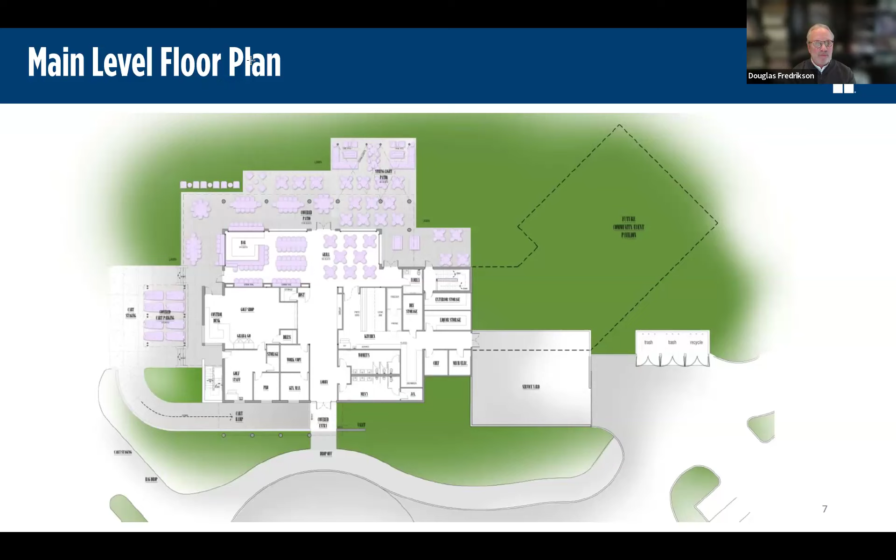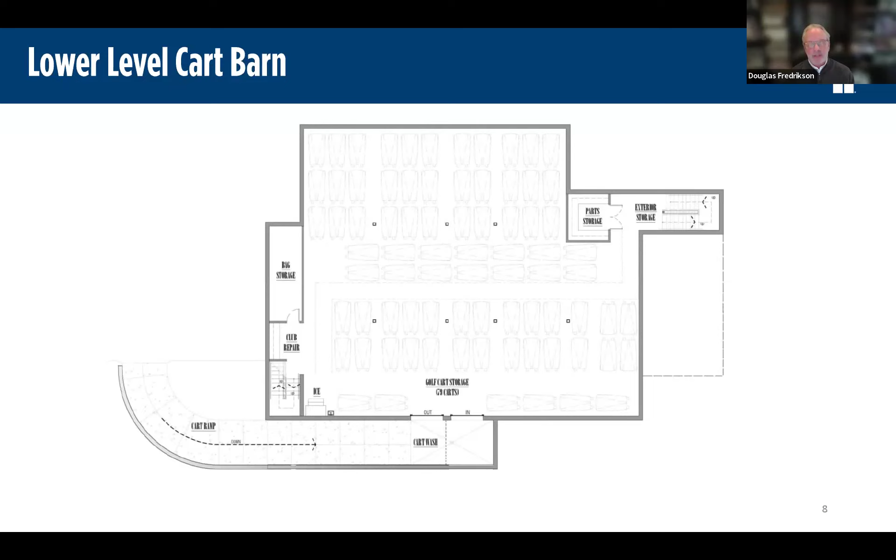We put the full fleet of 79 carts down below grade. This will be a basement level, accessible by a cart ramp that takes you out to the cart staging area. It includes bag storage, club repair, and small parts storage. This is very functional, covering all the parts we need and the code requirements. This is about 6,000 square feet of space, very efficient, as we're wanting to keep costs down because building costs these days are very expensive.

It's a very simple, low profile building, keeping in mind that it's expensive to build. So we're using a concrete block that is painted, a wonderful pale yellow color with white accents on the metal. This would be very modern looking. This extrusion of the box from the basement up through the floor and through the building is what's giving us our best chance of keeping the building within our projected budget.

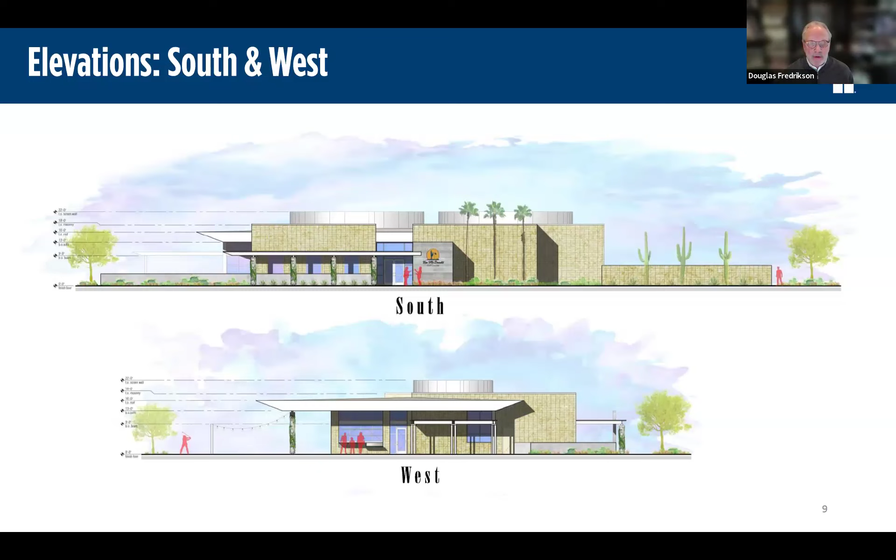The west elevation shows you the bar, where the people are in red there. That's where the bar is located under the covered patio.

Now we did some initial renderings that I think will give you a pretty good idea of what we're looking at here. I think it's a very residential, very comfortable, very golf-oriented facility.

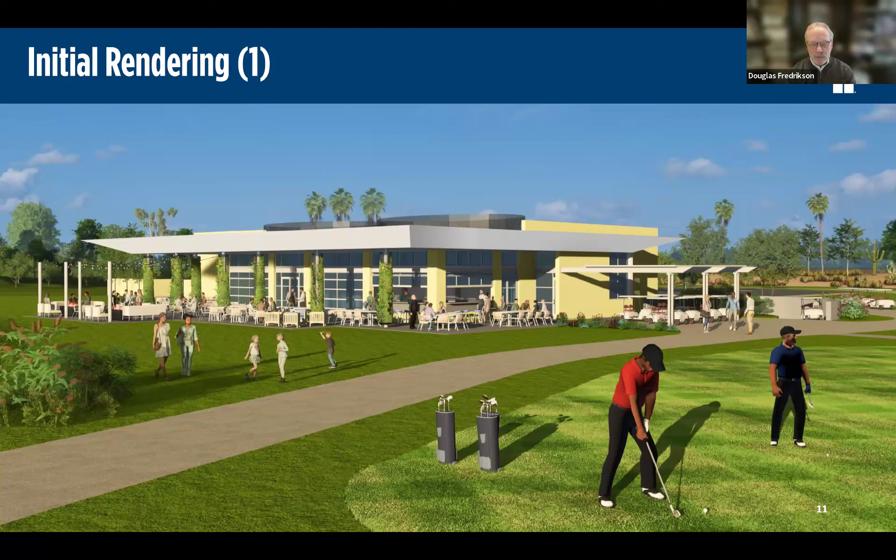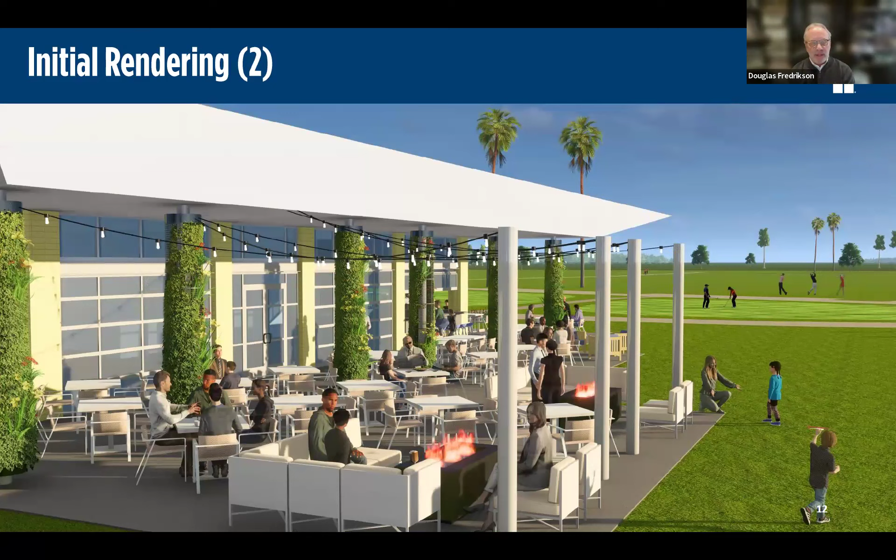This is a view of the patio. You can see the fire pits and the string lights. All those garage doors will open up to the outside, or movable doors - wonderful patio space.

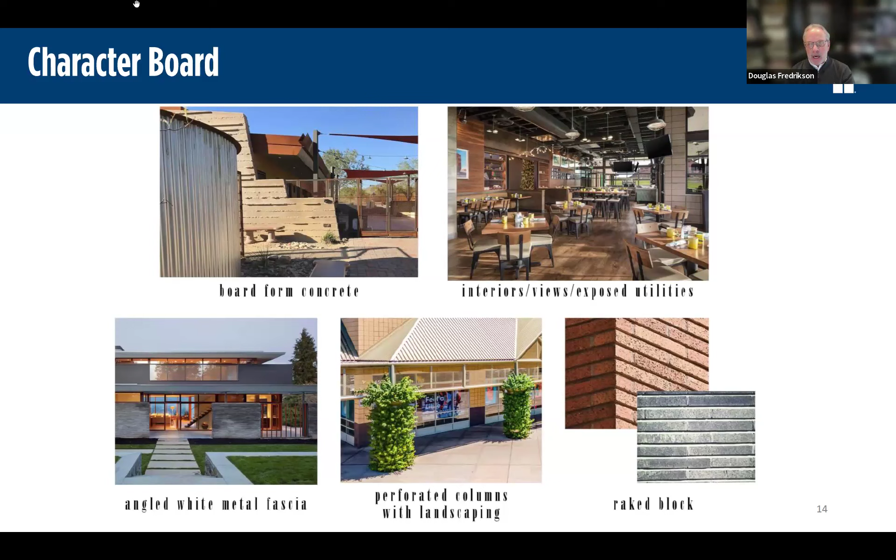Okay, all right, thanks. That's pretty much the story, and we hope you like it. We're very excited, appreciate it. Thank you very much, Doug.

A lot of work has gone into just prepping for this meeting. Again, these are some initial ideas and concepts where we want to hear from the community, whether you play, live around, or are part of the Tempe or regional community with an interest in Ken McDonald Golf Course. We know the course, as Tom mentioned, is a municipal facility. It holds a special place in the heart of Tempe, especially South Central Tempe. It does for me too - I started on the grounds crew at Ken McDonald back in 1996.

But we're really here to hear from you. We'd certainly love to answer your questions, but also want to point you to a public survey period that we have open today until March 20th. You can log on through tempe.gov/forum. This really is to help us discern who the folks are that are providing feedback, how you currently interact with the golf course and facility, and what some of your thoughts are based on the information we've shared today.

As I mentioned previously, this is a 3-phase process. We've got conceptual design kicking off here through June. That will then move into formal design - we'd anticipate that taking about a year or so, from July of '24 through June of '25. As I mentioned, construction, based on the funding we have available, can't start until July of '25. We certainly hope to move to that important part of the process where shovel hits ground and we start making improvements.

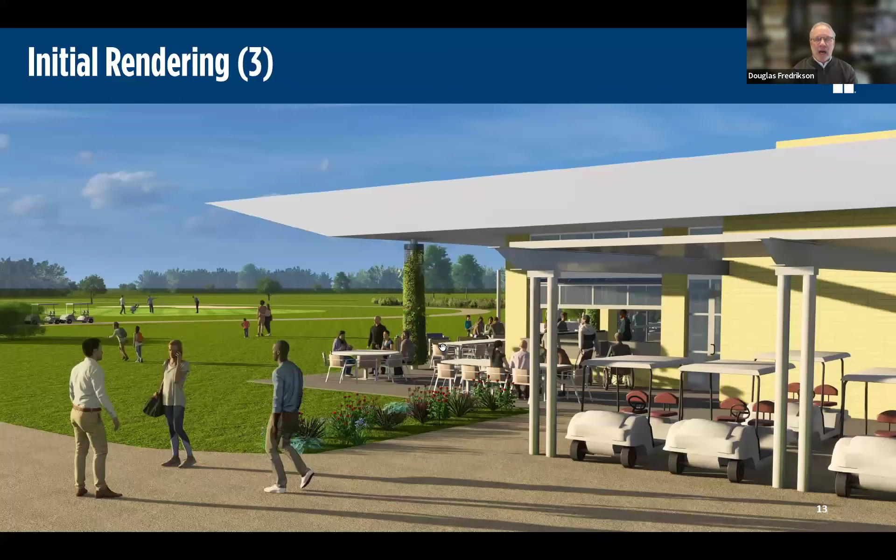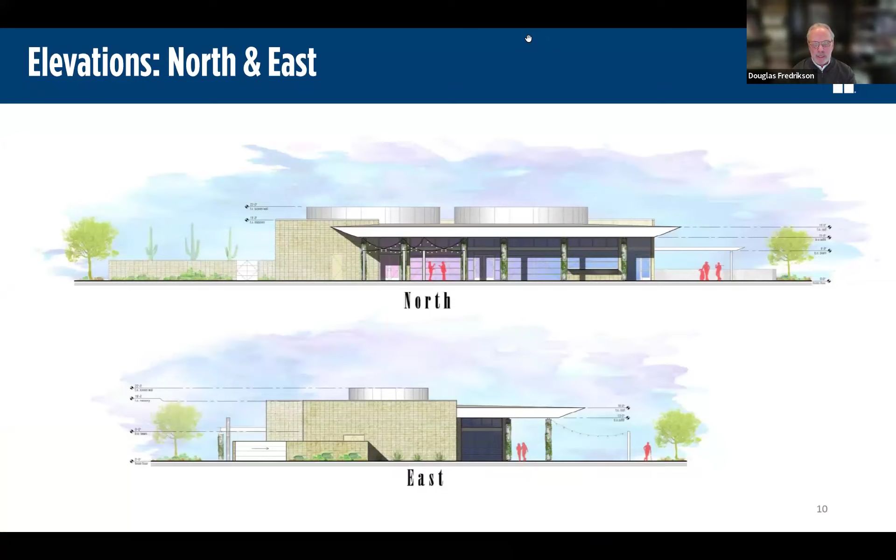Great, thank you. And then, what will keep balls hit to the 18th green from going into the patio area? Yeah, Doug, I think I can pull back one of the original views. Maybe you can talk to the landing zone piece, or Tom as well, based on experience. I'll defer to both of you.

Yeah, I'll jump in. Working with the architect, they identify safe zones—that's essentially what you see in those dotted circles. In the design, we're going to make sure we are well outside of those safe zones, and that's one of the reasons why we moved the green that much. Of course, we'll be looking at expanding the tee back to make up for that lost yardage.

We've also looked conceptually at containing people on the lawn area too, so they don't get too close to the green. That layer of detail is a rougher texture of planting we're anticipating, which the golfer will not want to end up in. Little details like that will encourage people not to want to be long on this hole because there's trouble behind it, so they'll have a tendency to want to be short. Now, it's not going to stop a lot of people who aren't good golfers from potentially flying in there sometime, but we're doing our best to pay attention to that.

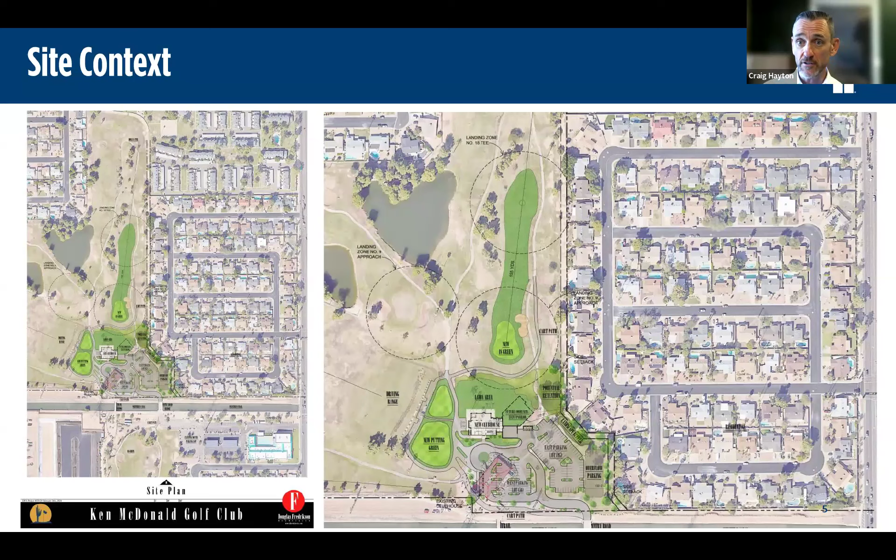On this existing concept, we've got two practice greens on the west side of the facility. We do ask if there's a desire to have one larger than the other - which one would it be, the putting or the chipping green? So those are some of the questions we're looking at, but please provide some input, some suggestions. If it's not anything we're seeking input on very clearly, please feel free to provide some comments.

So just a question related to that: at this point, have you identified how much smaller or bigger the new practice area will be compared to the existing one? No, I don't think so - it's still one of the conceptual aspects. Tom, anything you'd want to add? Not sure yet, but again, just rest assured that we will have good practice facilities there.

This question asks, while the design phase is occurring over the next 18 months, can someone figure out how the current fees can be even dollars rather than an extra 2, 3, or 4 cents? Tom, that's probably for you to consider. Yes, thank you for the feedback. I will look into that with the team.

This comment notes it'll be very critical to move the 18th tee box north an equivalent distance as the green, as the 18th is one of the more challenging holes on the course and the length is the demanding component, so you don't want the course difficulty lessened. Otherwise, plans look great, very nice job. Not crazy about the color scheme.

Another input: has adding some sunshade fabric canopy to the driving range been considered for patrons? That's definitely on the radar. The practice facilities and the golf course itself are not part of this specific project, but definitely on our research list.

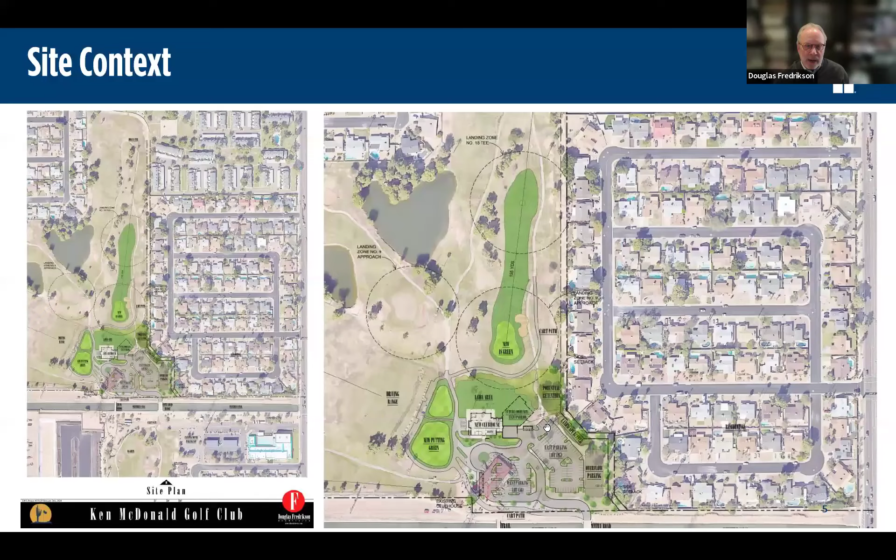And then, how wide will the setback be at the edge of the new parking area? Doug, I'll pull it up - it varies, and I can point it out because it's a little hard to read on the graphic. Starting with the lower right corner, that's 100 feet to the property line, and where we angle, it's 60 feet. Then you can see it's 215 feet over to where the building is. The dotted line adjacent to the residential shows the required 20-foot setback per zone. So we've tried to be fairly substantial in our setbacks, trying to create a buffer area we can do something with for the adjacent residents and work through something they're comfortable with.

We're also seeking input on the parking as west and east parking, not just lumping it into one area. So we're seeking input on both of those.

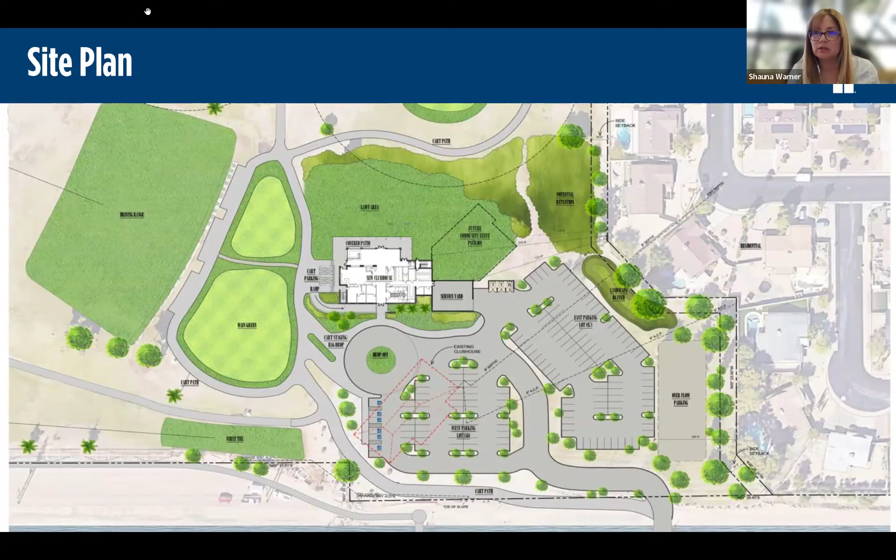And then a question on if there's been any discussion about returning the course to its original configuration - what is now 9 returning to number 18, and what is now 17 becoming hole number 1 again. Tom, I'll turn that to you. There's a lot of varying opinions on that, a lot of discussions. Similar to some of my other answers, that's not directly correlated to the clubhouse project itself, but something we continue to take input on and consider for the future, and it would probably tie a little more directly into when we get to the irrigation system design.

Okay, great. Well, I don't see any hands raised or any other questions in the chat. We do have time if anyone else has any other questions.